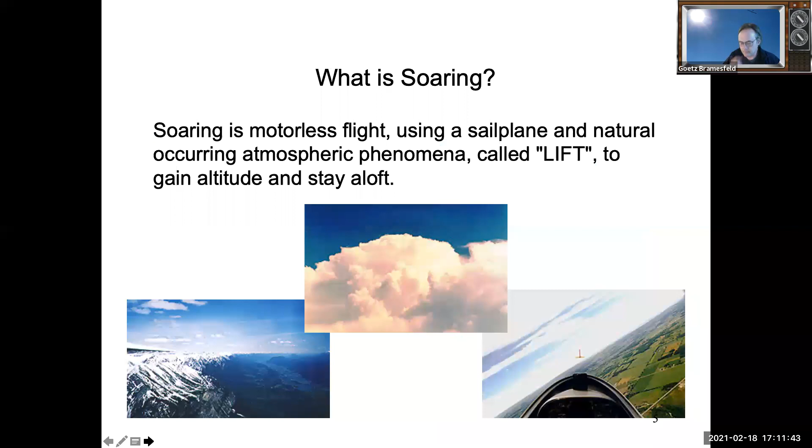Okay. Nope, wrong direction. Okay, what is soaring? And this, I looked it up in a definition. Soaring is motorless flight using a sailplane and naturally occurring atmospheric phenomena called lift to gain altitude and stay aloft. And we'll go into this, in particular lift, what kind of lift mechanisms are available.

Just to give you an idea of what's possible with sailplanes nowadays, currently the record in the total distance flown is slightly more than 3,000 kilometers. The longest straight flight is 2,200 kilometers and some change. And the highest altitude that was reached so far was 76,000 feet, so over 23 kilometers altitude.

These distance flights were all done in South America, indicated here by this line along the Andes on the Argentinian side of the Andes. And these were all flights done where the glider was towed up to altitude, released, and then basically flew on.

And just to give you a little bit more background, all these records nowadays have to be done within daylight times, which means if you think about the distance record where they flew 3,000 kilometers, they had about 15 hours of daylight at that time, depending on what end you were at, in El Calafate or San Juan. But that meant an average speed of close to 200 kilometers an hour. And I think this is not too shabby for not having an engine.

Just to give you an idea, the longest straight flight that was done in Argentina would be the equivalent of flying from Barrie to Iqaluit. Again, I think it's kind of impressive what's possible without an engine there. They used to keep records of endurance flights, but back in the 1940s or so, it was put away because it just became an exercise of who can stay awake the longest, and there was a safety risk involved with that.

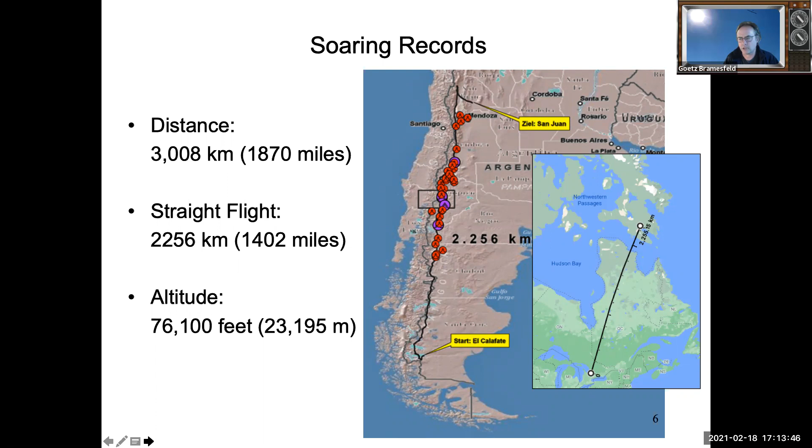So this gives a little bit of an idea of what's possible with motorless flight. And how is it done? Well, this graphic shows the equilibrium of forces. For example, in powered flight, we have the weight of an aircraft which has to be compensated by lift. And one of the penalties of lift is usually that we get drag. And so with the powered airplane in steady level flight, we try to compensate for the drag by producing thrust with our power plant, whatever way it is.

In a glider, we don't have this thrust component. And so as a result, we try to balance our lift and drag with our weight force. So part of the weight force is being used to compensate for drag, which means that the glider constantly trades altitude in order to overcome its drag. And so the glider, at least with respect to its air mass, always flies on a descending flight path, sometimes steeper, sometimes less steep.

Just to give you an idea, modern gliders now reach lift to drag ratios, which is basically a measure of the glide path angle, in the order of 60, which if you think of it in degrees, is approximately a 1 degree flight path angle. And if you want to judge how steep that is, stretch out your arm, put out your thumb, and look over the top and the bottom of your thumb, and that's about 2 degrees. So modern gliders have a flight path that's shallower than that.

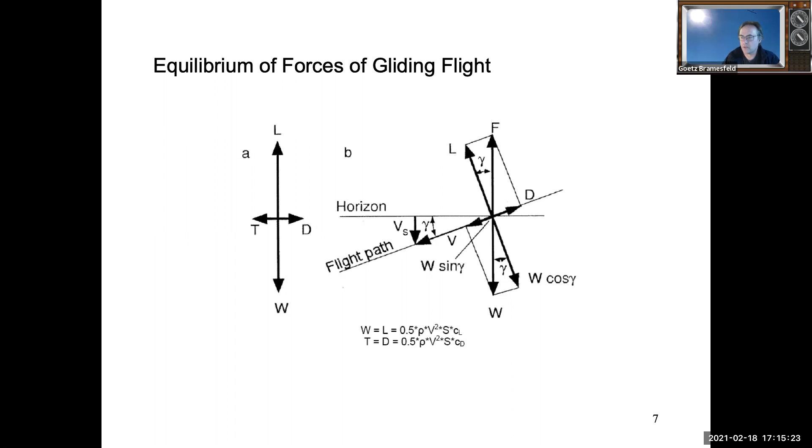Like I said, gliders are constantly descending within the air mass, which means in order to do the distances, you have to find air masses that rise faster than the glider descends. So it's the analogy of being on an escalator that goes up as you go down. If you don't go down the escalator fast enough, the escalator keeps spitting you out on top.

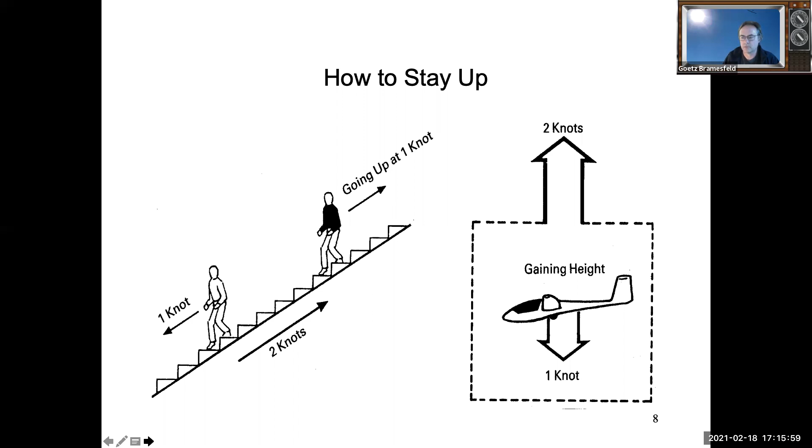So again, the glider descends within the air mass, and then we find air mass that ascends faster than the glider descends. And so this way we can ultimately gain altitude that we can then use to fly, do whatever we want to do. So at this point, I want to talk a little bit about the mechanisms that exist for lift, essentially, that allow us to stay aloft.

One of the oldest ones used in soaring is ridge lift, which is essentially you have a ridge, a hill, a cliff or something, and the wind blows perpendicular to it and is being forced upwards, and the upwards component of the wind often, if the winds are strong enough, can be sufficient to sustain the glider, and so you can fly along the ridge without losing altitude.

The other common way of using lift is thermals. Thermals are essentially, what happens is the sun shining on the ground heats up the ground, which heats up the air above the ground. And we can see this sometimes on a summer day on a parking lot, where the parking lot has heated up the air, and you can see the flimmering because of the changing density. And as the heated up air usually is less dense, and then with some other mechanisms, it becomes buoyant enough to start rising.

And then we have a fairly large mass of air that starts rising, and that also takes some other air with it, sort of like a hot air balloon without a hull. And then as it climbs, the air goes up, it expands and cools down. And if it rises high enough, eventually the moisture in that air package will condensate and form these beautiful little puffy clouds that we see on days that glider pilots like a lot. And now with the glider, you go into this rising air and use this mechanism to gain altitude.

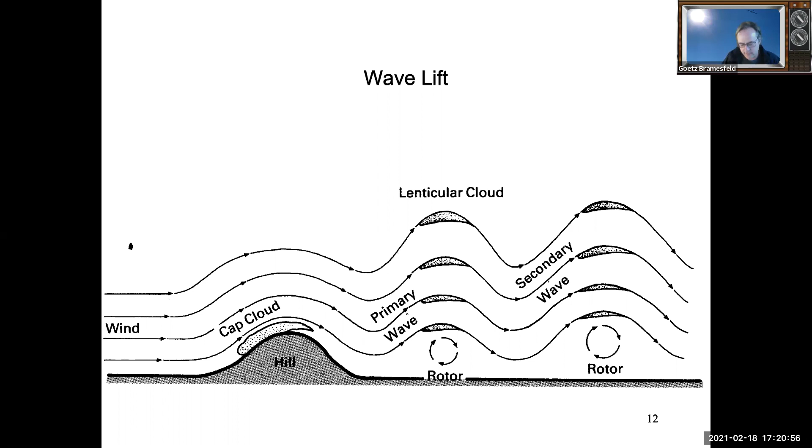And especially in regions like the front ranges of the Rocky Mountains, when the Chinook winds blow, you can see these clouds, and this is when you can use wave lift. I've done wave flights along the Appalachian mountain ranges. I've been at 8,000 feet, cruising at 100 knots, and it's amazing. A flock of geese came the other way using the same lift as I did. So they know what's good as well.

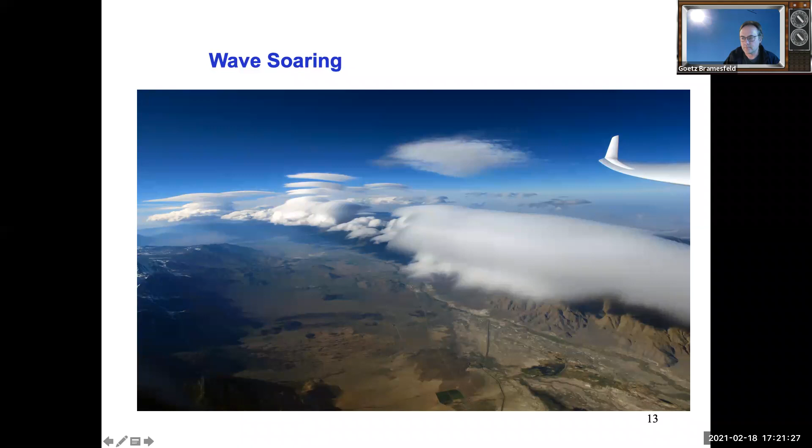All right, so for me, the ultimate fun of soaring is to go cross country. And that is basically you can have a declared task or you can just fly out free as you want. And what you do is you find a thermal, you climb to altitude, you then use the altitude to cruise to the next thermal, and then you climb up again. And then you repeat this until you finish your task or not. Sometimes you can't finish it.

But anyways, from an engineering point of view, it's a very challenging design aspect because, as I mentioned earlier on, we are limited to the daytime hours, also because thermals usually tend to die off when the sun gets lower. So from a designer point of view, you have to have a glider that climbs well, but also cruises well. So the climbing part happens often in the high lift region, the high lift coefficients, versus the cruising happens at low lift coefficients. And so there's a series of trade studies that the designers do, and this is where I personally find a lot of the fun from an engineering point of view.

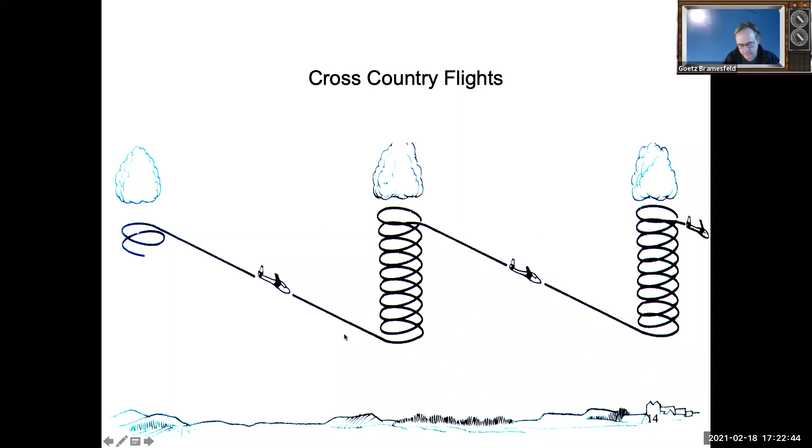There are some pictures from cross-country flights. This glider is thermaling. These are cruising between thermals. There's some ridge soaring. It's a compound picture, just to give you an idea about what it looks like.

Alternatively, many clubs in Europe use winch launching, where you have a big engine pulling on a cable, and it launches the glider like you would launch a kite almost. I learned flying on a winch. It's very cost effective, but it's also a very unusual flight attitude, and so it's something you have to get used to. More commonly in North America, we use aerotows, where you have a power plane that pulls a glider up, connected with a rope. You've got to understand that the forces on the rope are not super high, because it's primarily dictated by the drag of the glider, which, if you think of it, is similar to 1 or 2 buckets of water, so about 100, 200 newtons of force.

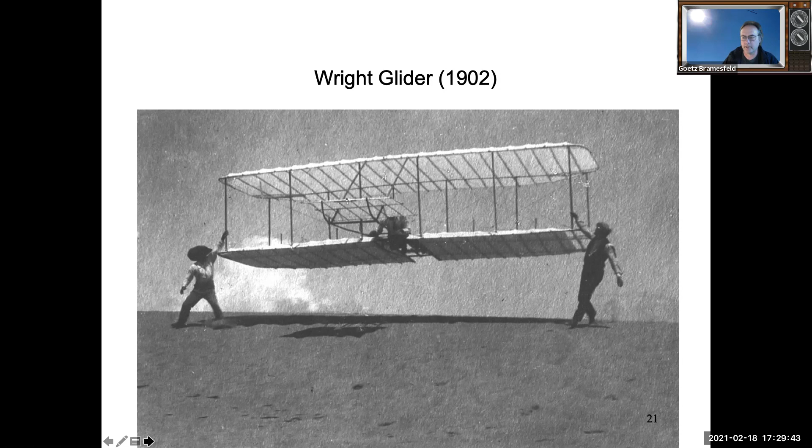In 1903, they got distracted with the development of the powered plane. But then in 1911, they actually went back, and Wilbur said to Orville, 'this gliding thing was a lot of fun, let's try this again.' And they built a glider again - 1911, eight years after they did the powered flight - and actually flew this glider for a whopping 9 minutes, which was then the duration record for gliders.

And they held this duration record for quite a while, not until after World War I when the Vampire glider was able to break this record, with a first 1.5 hour flight, and then increasing times by using ridge soaring.

I need to take a little step back history-wise. The Vampire was a design by students of the university in Hannover, Germany. There's a little bit of background here: Germany has a rich history in soaring, and this goes back to the fact that Germany lost World War I. As part of the Versailles Treaty, Germany was not allowed to do flight. Now, they didn't really specify flight in general, they said powered flight.

And just like here in North America, you had flight enthusiasts doing barnstorming with similar things. In Germany, you had people who were really excited about flying, and so thought, well, we're not allowed to do powered flight, so let's just do motorless flight. They got together, and early on, these student groups at different universities were very instrumental in doing some of the early designs. Now, this glider was the first one to fly more than half an hour.

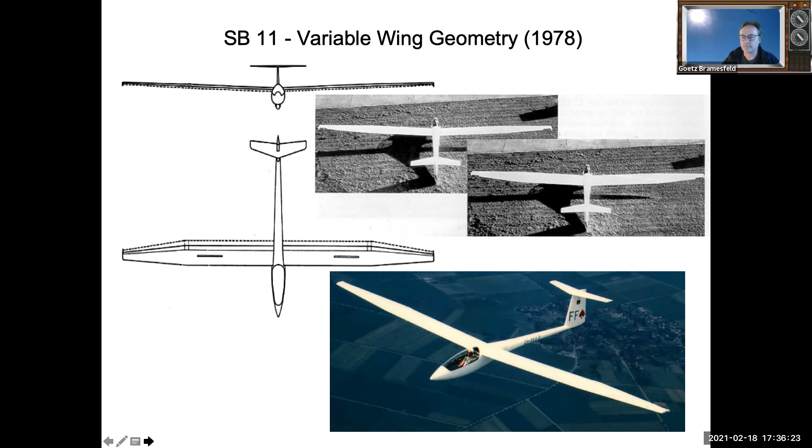There's also variable geometry, some Canadian connection, which is the Sigma project, originally built in Great Britain at Cranfield. It flew first in 1971 and had a Fowler flap similar to a high-lift Fowler flap to increase the wing size. But it was a little disappointing, and then Dave Marsden from the University of Alberta brought it to Alberta and modified it, with a first flight in 1980. It was an interesting airplane that could vary its wing area.

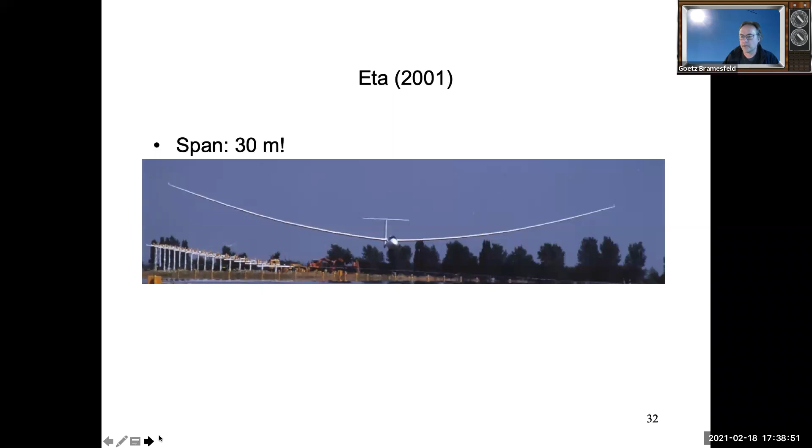More recently, in 2019, the Nixus flew, a design by Paulo Iscold, a Brazilian designer. It has a 28-meter span, roughly 92 feet, and it's been setting records—last year it set speed records over 1,000-kilometer triangles. The special thing about this glider is it has a fly-by-wire flap system so it automatically adjusts the flaps in flight and the pilot doesn't have to worry about it.

So this gives you an overview of the history of gliders. Now I want to go into the technical part. First, let me give an overview of what's happening. This graph was given to me by Martin Heide, who was employed by Schleicher, one of the aircraft manufacturers. As an aircraft designer, I find this graph fascinating.

It shows on the vertical axis the maximum distance flown, and on the horizontal axis the year. You can see Lilienthal's flights here, then the Wright brothers, and then with the Vampire and so on the distances grow and grow, getting all the way to 3,000 kilometers where we are nowadays.

You can see these jumps are always associated with some development—like ridge soaring allowed us to get further by flying along ridges. Here, people got accidentally or purposely into thunderstorms. People don't do this anymore because it's not a wise thing to do.

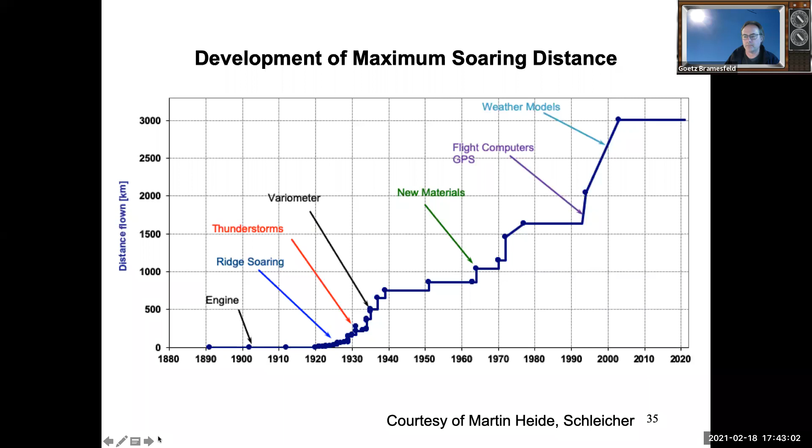Now, this has also had an impact on our design conditions, and I will go into this a little more. So the very new development in soaring that is having a definite big impact is electric flight.

It enables motor gliders with much simpler propulsion systems, because you don't have a combustion engine to worry about. There's just a little electric engine, which doesn't have a lot of drag. You can pop it out, you can pull it back. You have batteries in the wings, and they're easy to turn on and off.

You don't have to worry about it being too cold and failing to start. And even if it doesn't work, the drag penalty is somewhat limited. So electric flight is definitely here to stay in gliding for motor gliders, and we'll see more of that.

Other advances are related to high altitude flight. This is the Perlan project. The objective is to fly to 100,000 feet. They've set the record at 76,000 feet so far.

They're using, it's a whole team, sponsored by Airbus, and they want to get to 100,000 feet.

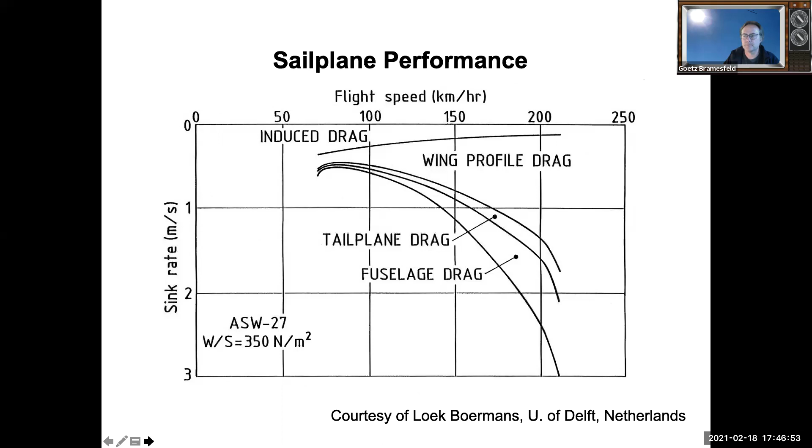There's obviously a long tradition with laminar flow airfoils, natural laminar flow airfoils in soaring. But there's some ideas, and Loek Boermans works on this, to use boundary layer suction basically to manipulate the boundary layer in order to maintain laminar flow for a longer time and take the advantage of the low drag of the laminar airfoils. Not that new a concept anymore, it's now already like 15 years old, but hasn't been really seen yet in practice. There's actually some wind tunnel tests going on about this.

It's a slotted natural laminar flow airfoil that Dan Somers designed. The idea is it's a slotted airfoil, like a slotted flap, but it works the way it works in cruise. The secondary element produces all of the lift that you need for compensating for the weight, and the front element has fully laminar flow through favorable pressure gradients. Then when you want to fly slower, in the region where profile drag is less important but induced drag matters, you load up the front section and get very high lift coefficients, which allows you to reduce the wing area essentially and optimize your aircraft there. This is a concept that's been explored also for commercial aircraft, because it can also be used for transonic airfoils.

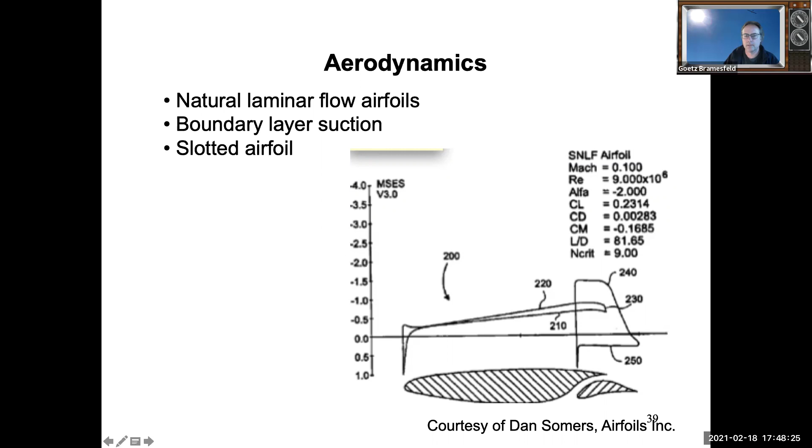On the induced drag point of view, in the last 30 years the thing which has been the biggest change has been winglets on sailplanes. All modern gliders nowadays have winglets. Also, new design methodologies and production methods make it easier to have these very complex wing shapes with polyhedrals, and there's a lot more happening.

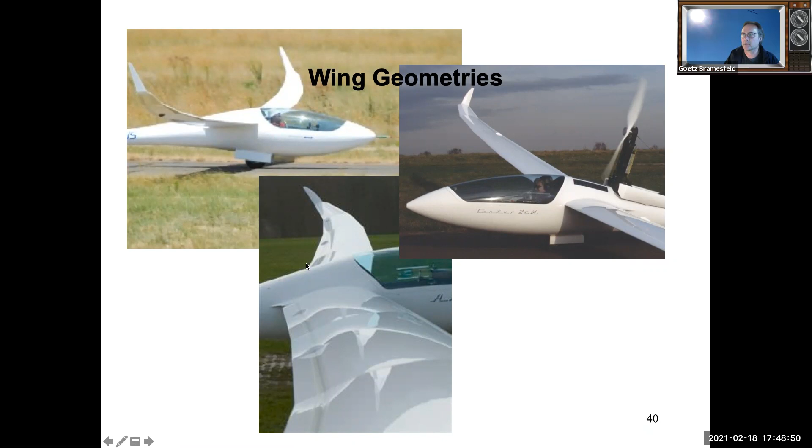The other thing besides aerodynamics which has changed is advanced structures. This is the spar of the Nixus, the 28-meter span glider. It's made of a high modulus carbon fiber, which was built in this homemade autoclave. It's a prepreg that's being laid up and then put into this autoclave to produce pressures higher than just 1 atmosphere. And here's a testing of this wing.

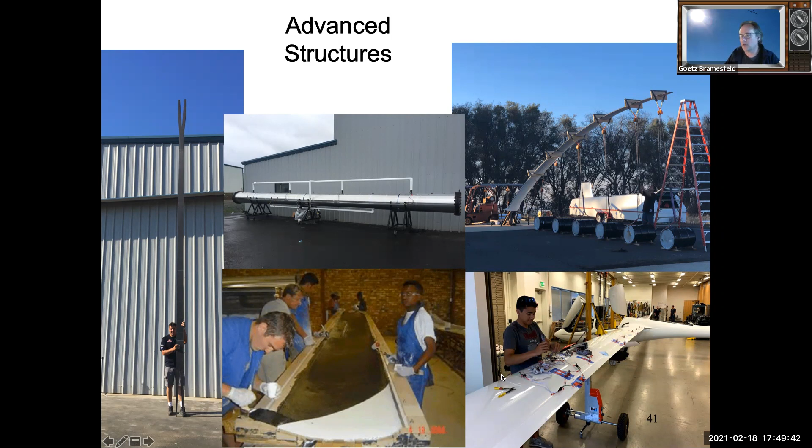So it's very flexible. Composites, even though these wings are still built mostly by hand layup, enable us to have high aspect ratio wings or very slender parts, and this often causes issues with flexibility. This is the Nixus set up for a ground vibration test because flutter is an issue, and this has been a challenge in gliders for a long time. I have a little video here.

Some might have seen this. Let's just turn the video off. So let me explain to you what happens.

We've been for a while looking into whether you can use aeroelastic tailoring, maybe to extract energy from gusts as you fly through. That's some work I have a graduate student working on, and I'm going to skip over this point since we're running a bit out of time. But the idea is that by tailoring the structure, the layup of the wing, we can have a certain bending-torsion coupling that will allow us to reduce drag of the aircraft.

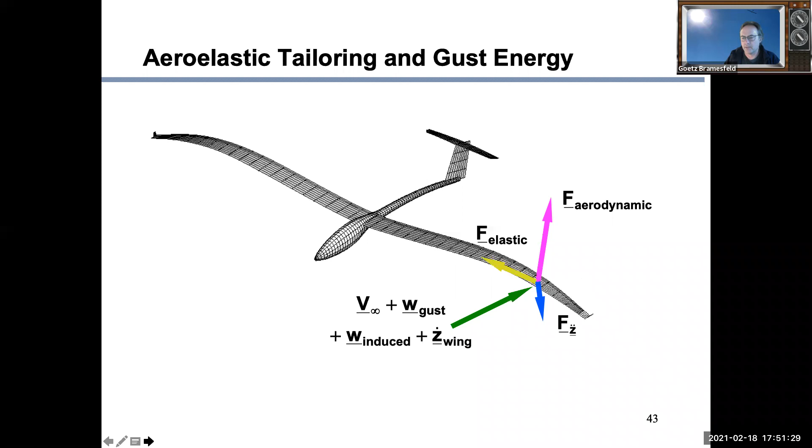I mentioned that I was at DLR last year for a sabbatical, and DLR actually has a research glider. This is a Discus 2C, which is equipped with a nose probe that has a 5-hole probe, and it has a data acquisition system and all kinds of sensors to measure airspeed, altitude, and so forth.

And it's a highly sophisticated airplane, and it's often used to measure the performance of other gliders by having them fly in the same air mass. And then knowing the performance of this glider, you can back out the performance of the other glider. And it's done very regularly with very high precision, which is pretty amazing to watch.

But this glider is also equipped with an autopilot, and this autopilot is meant for the glider to fly high precision maneuvers. And the latest focus there is to explore turning flight performance. Again, because gliders spend a fair amount of flight time in turning flight, we want to understand the aerodynamics better. And the experiments are often compared with prediction models. And this is some work that I've done.

So first, this is the Discus model in an aerodynamic model. You see the wing here, you see the empennage, and then this is the wake during a 60-degree bank flight. And this model allows me to figure out what are the drag components, what are the flow components, what is the lift distribution, what are our trim conditions, and so forth. And then we compare it with the flight test data.

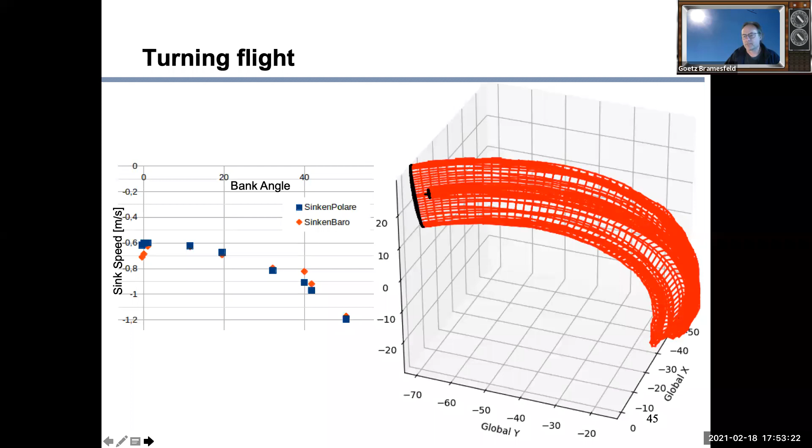So this is a little idea about the research part, and I want to point out I'm part of the board of the International Scientific and Technical Soaring Association, which is OSTIV. It's an abbreviation of the French words for this, and OSTIV has been around for several decades, since the 1950s, and is interested in any technical and meteorological aspects of soaring related to motorless flight.

Every year, we usually have a Congress parallel to the World Gliding Championship. It was scheduled last year in Stendal, Germany, but was canceled because of COVID. But it's scheduled again for this year. There will be a remote option. I want to encourage you, if you want to participate there with a paper, feel free to submit an abstract. We also have a journal, Technical Soaring.

Check it out on the internet. It's open source. Also, the editor-in-chief, Kurt Sermeus, sits in Montreal. I don't know if he joined us today. And if you have any questions, feel free to email me or contact me. Otherwise, I will point you in the right direction.

But coming back to the technical part, soaring has come a long way from the Wright brothers with their glider to modern open class ships that are all composites, carbon fiber, and so forth. But at the end of the day, it's still all about the fun of soaring. And here's a small video that a friend of mine made at the gliderport, and it shows you the progression of a flight.

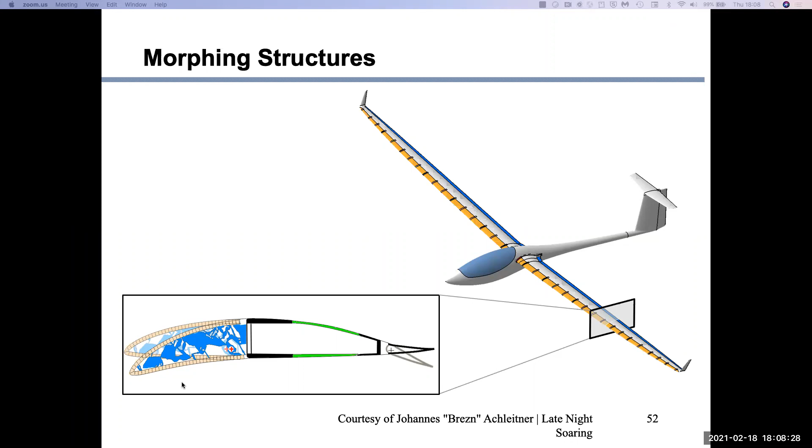Okay, back to the chat here. There's a couple of more technical questions from Paul. He says, did your wake rake drag match the wind tunnel data or match the CFD? So yes, it did actually. One of the things is we had to estimate the lift coefficient, but we did measure the drags and estimate the lift coefficients based on the overall aircraft lift coefficient.

And we'd taken the contour of the wing and digitized it, because the way you build wings is never the way you design them. There's always inaccuracy that gets in during manufacturing. But we did compare the results with XFOIL results back then, and it compared quite well.

The main reason we used the wake rake was to do a study where to put turbulator tape. On the lower surface, that flying wing has a reflex airfoil which has a laminar separation bubble on the lower surface, which at a speed of 120 kilometers an hour causes a whistling sound, because that laminar separation bubble keeps oscillating to the trailing edge back and forth, and it makes a really nasty whistling sound. Now, we knew that we can get rid of the laminar separation bubble by putting turbulator tape, so zigzag tape or knob tape, on it to trip the flow to a turbulent boundary layer.

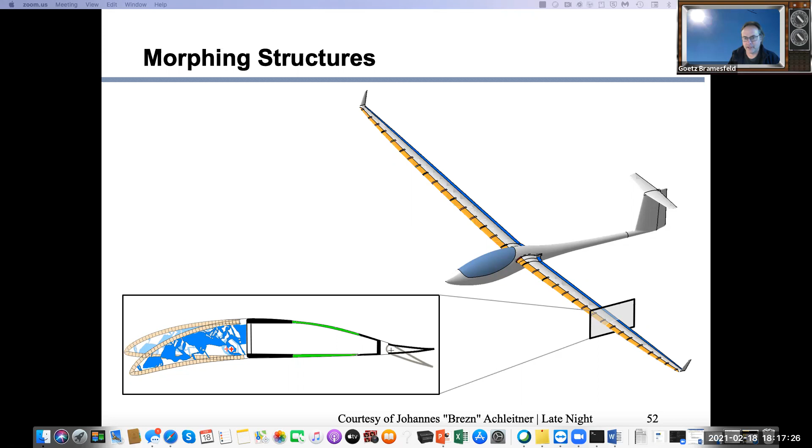A friend of mine - we were flying in Hungary - he landed out at a nudist beach. So that was also a different experience.

Obviously you need help to get out of the field. Are the people who own the field generally friendly, or do you get annoyed people who complain about you spoiling their crop or inconveniencing them? To be honest, most people are super friendly, extraordinarily friendly. They're very interested in what's happening there. Farmers usually see very limited crop damage because the glider doesn't have a very big footprint - most of the damage is done by carrying it out of the field. So most people I've encountered were super friendly, super accommodating.

I had one bad example where somebody threatened me with a shotgun. I was in Pennsylvania, only a couple miles away from the glider port. To this gentleman's excuse, I have to say he'd had a bad experience where some glider pilot had landed and done some damage to his crop without getting back to him, so I don't blame him for being upset about that. But for the large part, people are super friendly, they feed you, you get to meet them. I don't want to land out, but it's not the worst experience.

I'm glad you were able to do some gliding during your sabbatical in Germany. I guess you didn't do as much as you hoped to do. Did you have any particularly memorable experiences there, or in other time you've been gliding in Germany? Obviously the landscape there is different than in North America - I imagine the Alps must be particularly spectacular.